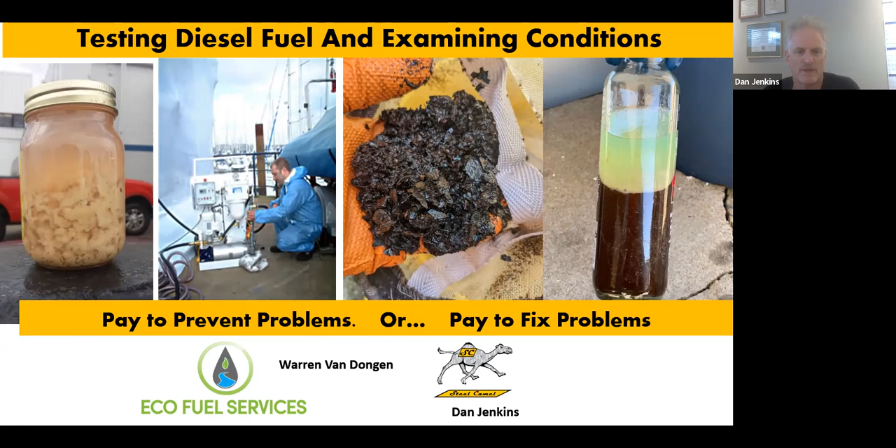So why test? Why should you pay attention to water? Well, I got 7 good reasons. One is corrosion. Two, pumps wear, injectors wear. Three, tank cleaning. A lot of people in this industry pay for tank cleaning. Warren and I are both involved in tank cleaning, but we want to help you avoid tank cleaning if we can. We want to improve fuel quality.

Warren, really quick, can you tell me what customers really care about with fuel quality? So fuel quality for my customers, because we're talking mainly long-term storage of emergency fuel, hospitals, data centers, it is about preserving the uptime of their equipment, keeping the fuel ready to go, which means keeping the water out. Once you keep the water out, you reduce a lot of particulate caused by corrosion and microbial growth and accumulation. So we're looking to keep the fuel clean in storage for long-term use.

You get to a boat customer, we're talking people who have usually been out on the lake, out sailing, out powerboating, get some rough water, rough seas mixing the water in the fuel tank, and it gets picked up and plugs their filters and leaves them stranded out in the lake, and that's a safety concern. It's dangerous when you're out unpowered. So yes, I sell to a guy who delivers sailboats to the Bahamas, and he's afraid he's going to get stranded and float into the Bermuda Triangle. So anyway, we're really into that.

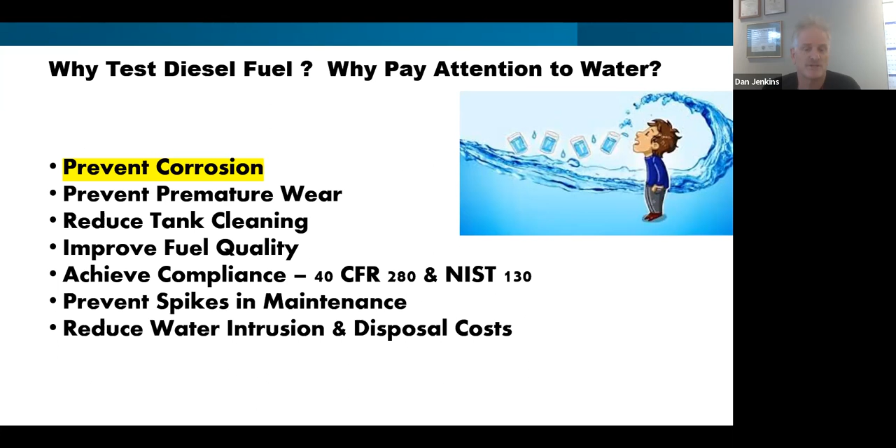And those of us in the gas station market, there are rules about how much water you could have in your fuel. It's called NIST 130. And there's also rules for leak prevention, 40 CFR 280, for those of you in the gas station industry. Okay, so we got that down.

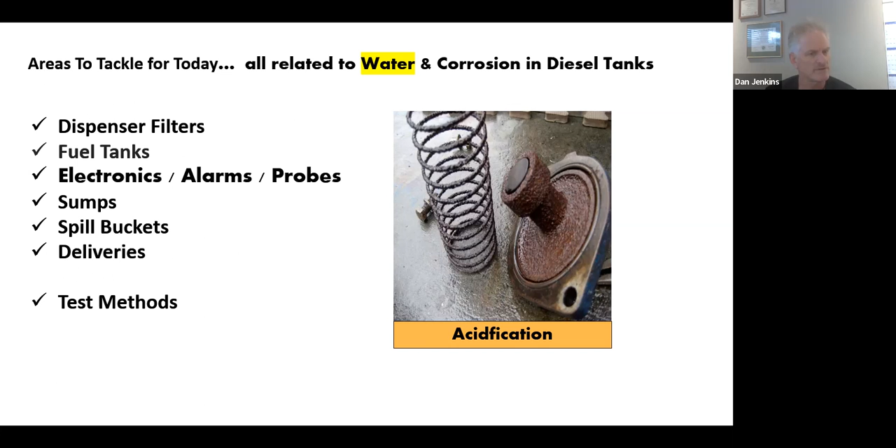So we're going to talk today about how we test fuel, but also where to look for the fuel problems with the water. So we got dispenser filters, obviously we got fuel tanks, a lot of problems in the gas station market with electronics, alarms, and probes, so we'll talk a little bit about that. And of course, one of my favorite subjects, sumps and spill buckets, because that's a very good entry point for water. We'll talk a little bit about delivery drivers, and we're just going to review some do-it-yourself test methods.

Here we go. So how did we get here, Warren? Why is there so much more water today than there was 25 years ago? Well, I have a really cool slide that I made up. Basically, it started in California, Denver, Portland, Maine, a little bit of the state of Washington, anywhere there's mountains. We had smog, bad smog in California. I grew up with smog, and we had to clean it up. So they had to change some of the diesel rules and reduce the sulfur. And that was in 2006.

The other problem we had was we were depending on oil from hostile countries, like we are today. And as you know, we have inflation and all these kinds of things. I'm trying to stay away from politics, but we wanted to reduce the amount of oil we were spending from hostile nations. In 2007, they passed the Energy Independence and Security Act. And you can see down here that 30 or 40 Republicans actually voted for it.

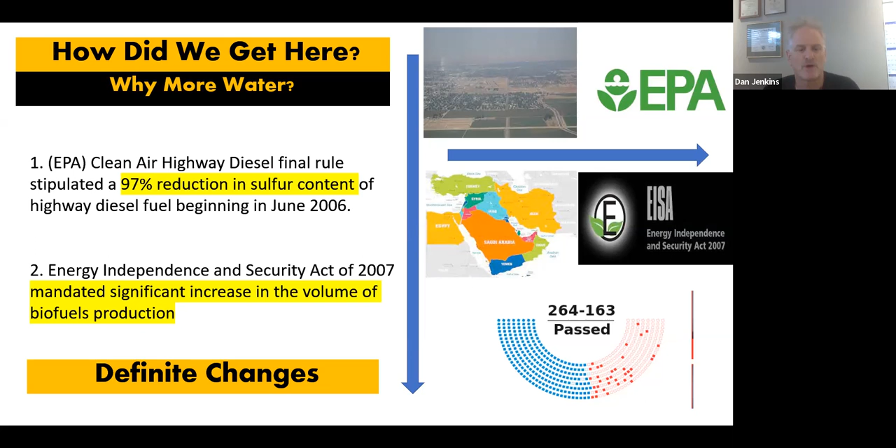So it is a bipartisan bill, and it brought about changes in diesel fuel. So we have... go ahead, Warren.

One of the big issues with going to mostly domestic production and limiting overseas production is we no longer have the residence time for the fuels and petroleum to settle the water out. Our domestic production now is like everything else, on time. So the fuel goes from the distillation process right into the pipeline, right out to the tanks for distribution. We don't have big settling reserves of fuel where the water used to settle to the bottom of the tank.

So we're just bringing water right along with us that used to be captured during the storage process. And that's why a lot of gas stations, when they get a delivery, it's all stirred up. You heard that before, Warren? Oh yeah, gotcha. And they tell you to avoid the gas station when you get a big delivery, particularly if the tank is low.

The test facilities that I used to install, we always put diffusers on the tank fills to help reduce stirring of the bottom of the tanks. But the guys want to get in and get out, right? So they're pouring really fast. Yep, 350 gallons a minute. Ouch.

Okay, so Warren, we have 5 different fuels I've listed. I'd like to go down through them one at a time and just tell me what changes you may or may not have noticed in your world.

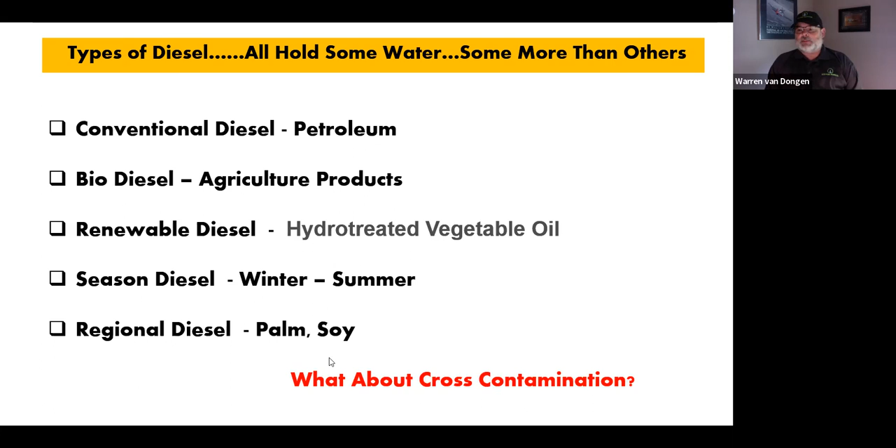Gotcha, thank you. So with all these changes in fuel, we've got more water held in the fuel column. Let me tell you briefly about some of the changes it's caused in the tanks.

One is corrosion, right here on the left. That's how I got my start, I was in the tugboat business. The guy told me he had a hole in his diesel tank from corrosion, from the acid buildup.

Two, we see a lot more fuel injectors with blown tips, and blown fuel pumps, because the water is abrasive. The water causes wear patterns, and it gets really hot and can actually blow things out. I'll have another slide on fuel injectors in a minute.

Third, down here on the bottom, we see a lot more sludge—more water, more sludge. And fourth, we definitely see a lot more corrosion on the top of the tank. Preventing this and fixing it is one of Steel Camel's businesses. That problem hasn't gone away, and it's only been a problem from about 2009 on, so only about 13 years old. Back in the old days, they never had that.

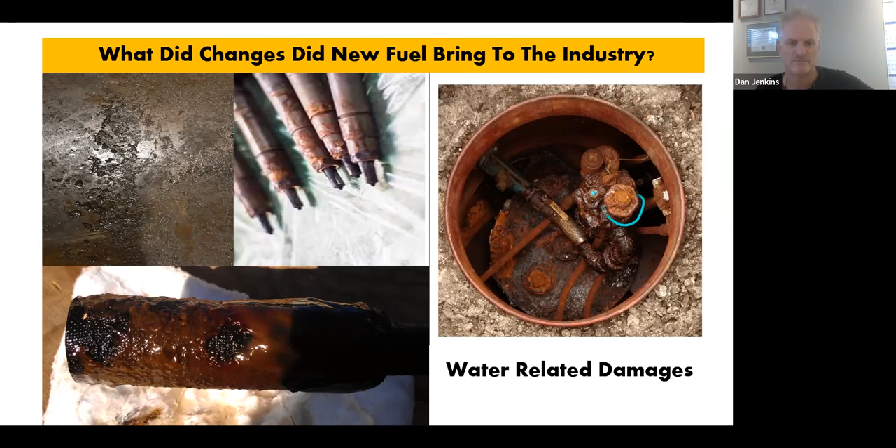Any comments on blown fuel injectors, Warren? You see them from time to time? Oh yeah, in the data center world you're always hearing about getting Cat or Cummins in changing out injectors on an engine or replacing the whole top end. That's the common rail injection system, and when you're at 60,000 psi trying to inject fuel at a 1 micron droplet size, a little bit of water goes a long way in gumming that works up for you.

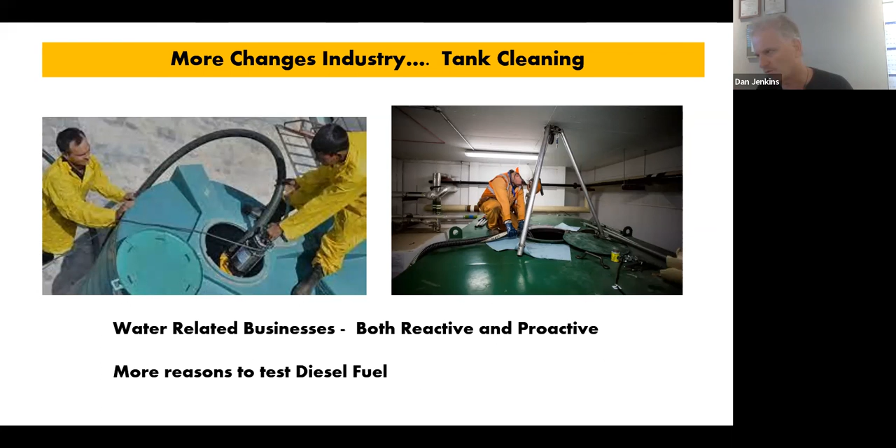Gotcha, thank you Warren. So a couple other changes, then we'll get to the testing. There's a lot more tank cleaning today, so keep on the lookout if you're having excessive tank cleaning—both proactive and reactive. A lot of people are just accepting they've got to get their tanks cleaned once a year and pull the sludge out, and then the problem comes back in 7-8 months.

There's more reasons to test your fuel if you're paying for a lot of tank cleaning. So how do we know water's getting in? If you see pump-out tanks, which is really popular in Florida because we have so much rain getting into the tank—notice this little puddle on the right-hand side. When it rains really hard, the parking lots puddle up and the lids can't handle it. In another seminar we'll talk about how to prevent that.

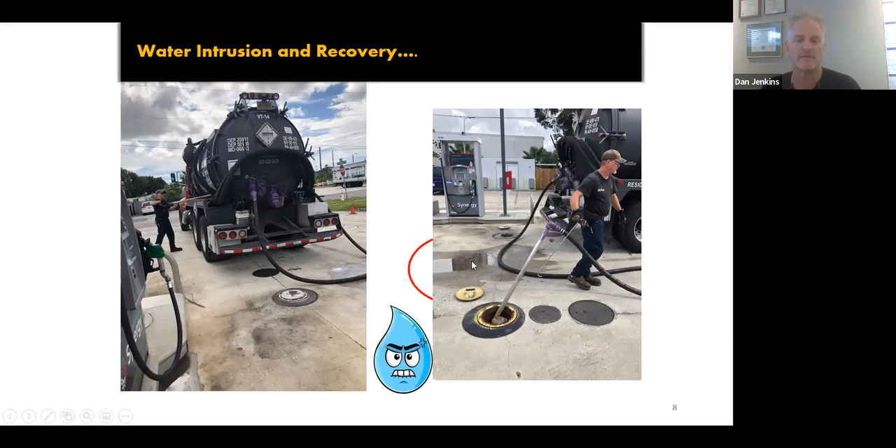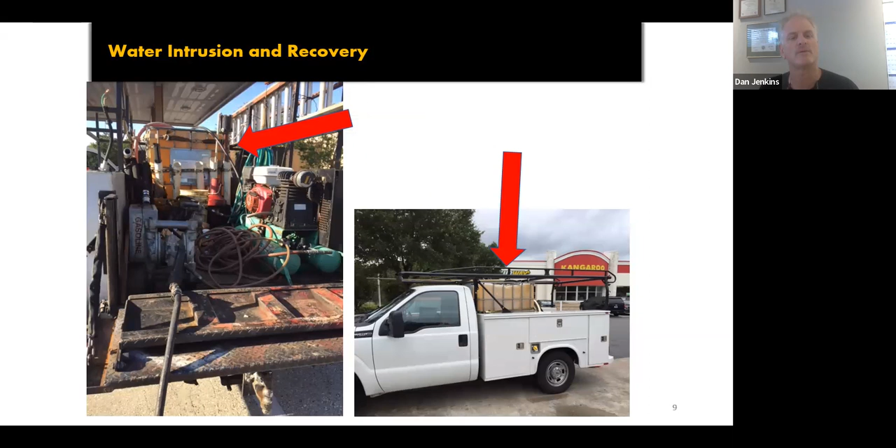Second, if you run into contractors—some of my best customers are contractors, I love them to death—but they're pumping out water all the time. If you ever see these trucks around pumping out 30, 50, 80 gallons, that's a reason why you need to test your fuel, because you don't want that to get up to 100 gallons. Another warning sign that you've got water that you need to test for.

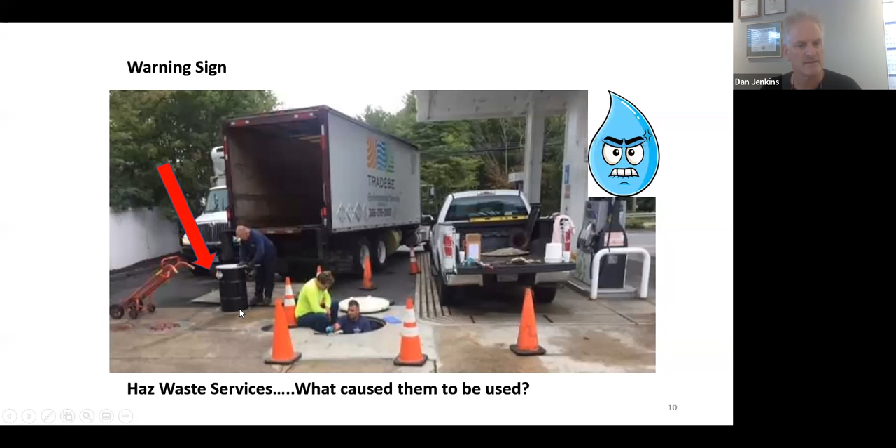If you see this guy over here, I took this picture in Boston—it's actually a hazardous waste guy picking up water, hazardous water that gets into sumps and spill buckets in the bottom of the tank. They just put it in these drums and this guy comes by and picks it up. Very expensive, particularly for retail stores.

Some quick statistics: I Googled fuel injector repair within 20 miles from downtown Los Angeles. Holy crap, 16 places listed in Google search that actually do fuel injector repair within 20 miles. That's pretty high if you ask me. What do you think, Warren?

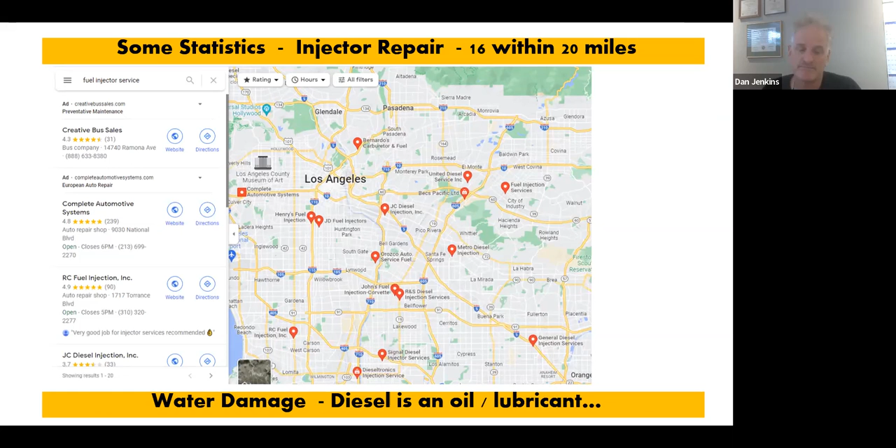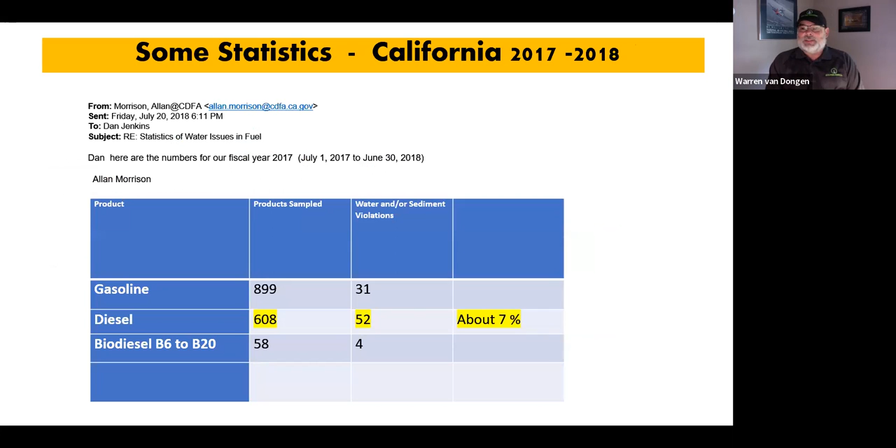Well, there's a lot of big trucks running out there, a lot of engines to be worked on and a lot of fuel issues to be remedied. But fuel is supposed to be a lubricant—as you take sulfur out and everything else, the lubricity definitely goes down. Yes, but also the water increases and causes the problem. Get back to that high pressure common rail fuel system—it's a money maker for the repair shops.

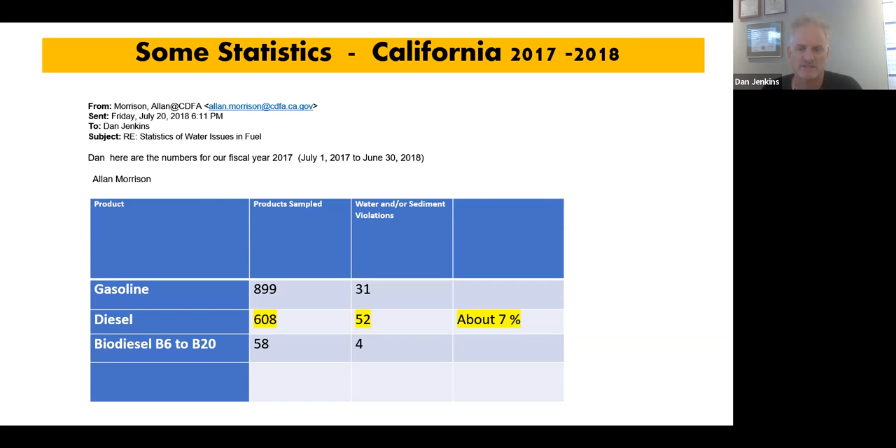There you go. A couple other quick statistics: in California, 608 random diesel tanks were tested at truck stops and gas stations, and 52 had violations for excess water—that's really high, 7%. In my old state of Florida, we had a study done in 2020, I believe, and holy smokes, 4%.

So 43 out of 1,300, we had 48 violations, right? There's about 4% of all the diesel tanks tested by the state that had excess water in there. So that's why we need to do testing ourselves.

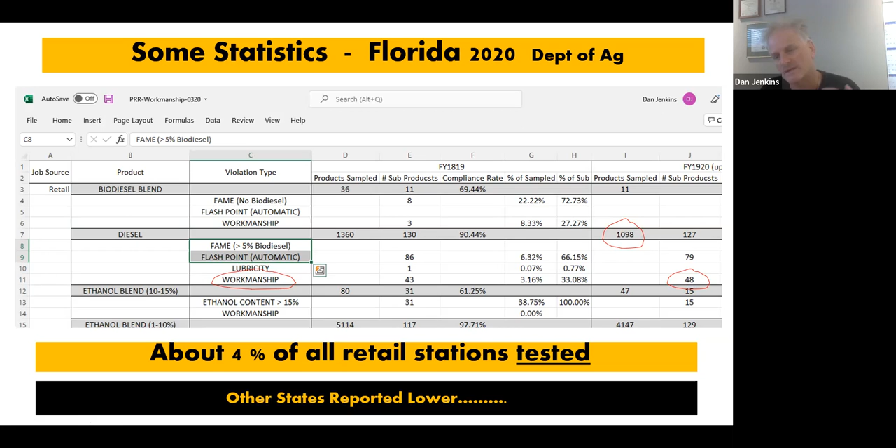Bad. So Warren talked a little about how the fuel doesn't settle out. It gets condensation buildup in the tanks, gets in the pipelines, gets in the delivery trucks. You have an empty truck full of hot air, you put cold fuel in there, just like stepping out of the shower, you get condensation buildup. So we do get water in our delivery system.

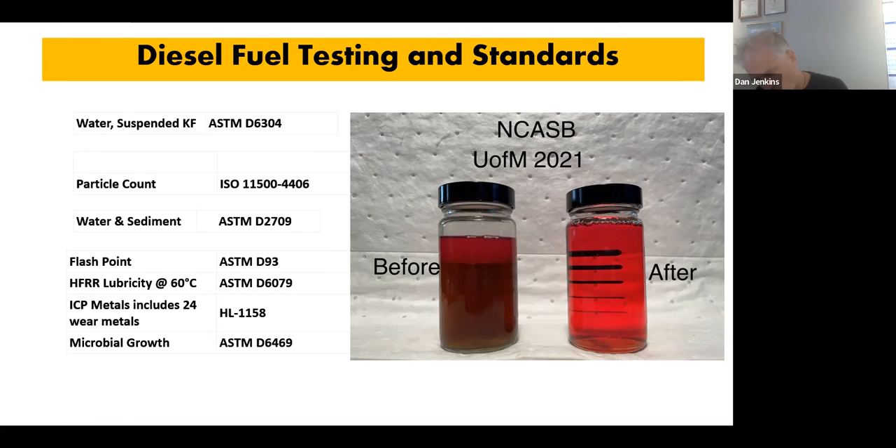When we remove this water, we actually go through very few filters. We've got these tanks where it's just a little bit of water, accumulating over time from vapor space, the top of the tanks. So in the field, we do a visual analysis per the ASTM standard. That's what the gradient lines tell you - you're judging clarity per ASTM. And then after that, the samples go to the lab for actual particulate and flash point and microbial growth testing to confirm that the fuel's good. So the bottom line of this picture is the fuel, even though Warren cleaned it, gets dirty just by sitting there, right? Yep.

Gotcha. Okay, so let's review where this water collects in the tank. I changed this slide around a little bit. So we have water that collects on top, above the fuel line. We call it atmospheric - some people call it condensation. If you open up the bottom of a sump lid or the bottom of a tank, you'll see rain droplets on top. Warren, can you talk a little bit about the water at the very top of the tank? Yeah, so the water at the top of your tanks is open to the atmosphere. So everything that's outside the tank vent is going to end up inside the tank through aspiration.

The process of the fuel expanding and contracting with temperature, along with the water table, and any number of things, can cause the tank to aspirate. Then as you're using the fuel and drawing it down, you draw air into the tank. That moisture, especially in an underground storage tank where the average temperature is going to be in the mid-50s, becomes a problem. You suck air out of a 90-degree, 100% humidity environment into a tank at 54 degrees, and all that moisture ends up in that top space.

So then eventually number 2 happens. It starts falling into the fuel column, but it's just not quite heavy enough to fall down. That's why we have cloudy fuel.

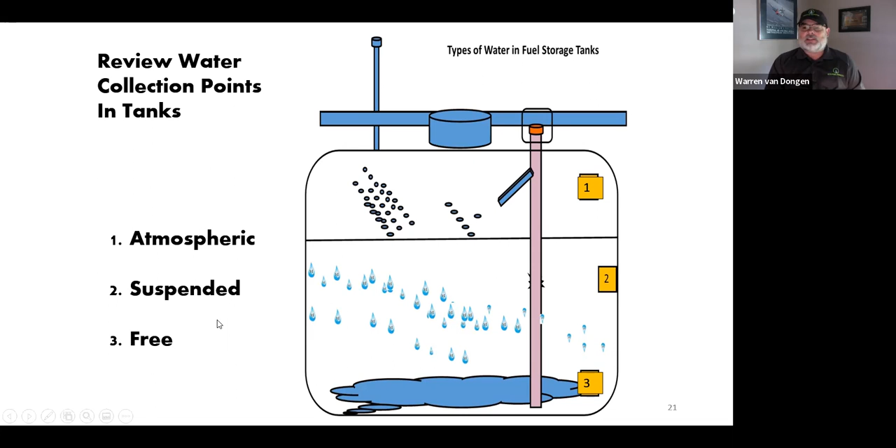So we're moving along a little bit, Warren, and I want to talk to you about 5 or 6 ways you can detect water, how you gather samples, and how you can do your own internal fuel testing and quality checks before you send them to the lab.

So I have 3 ways right here. On the left, I have a little filtering machine. You put contaminated fuel in this housing, run it through this little pump and a little filter, and then over here in the middle, you see the results - cloudy and clean. That's one way to test your fuel.

Second, we could just do visual observation. And third, some people like to do chemicals. On the right, we'll talk about it a little later - it's a little test where you can put a couple of droplets of this powder in there, and if it turns pink, it's bad.

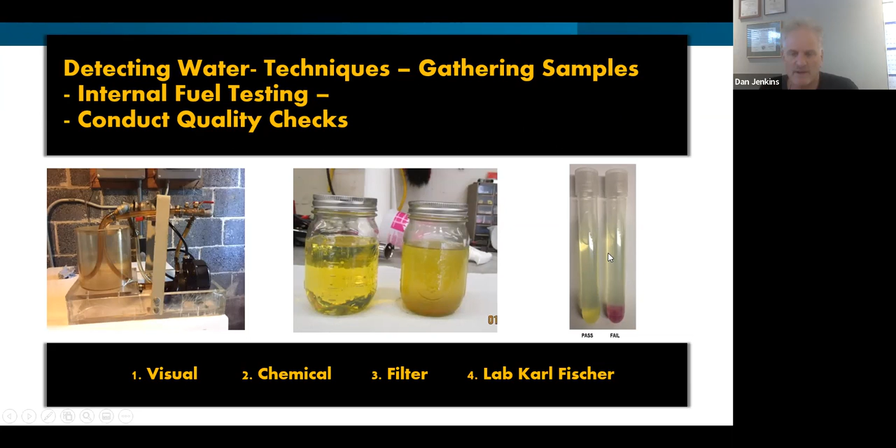Okay, so let's review some of these tests. First, we need to gather samples of the fuel. Warren, would you please talk about using this bailer? What do you like about it? What don't you like about it?

Every method of sampling has its pros and cons. The bailer is nice because it gives you a nice cross section of the fuel as it passes through. But as you see, the bailer has a tip that doesn't allow it to quite get to the bottom of the tank. So you miss free water when you use the traditional bailer style, but you get to see this really nice cross section of what the bottom of your tank looks like.

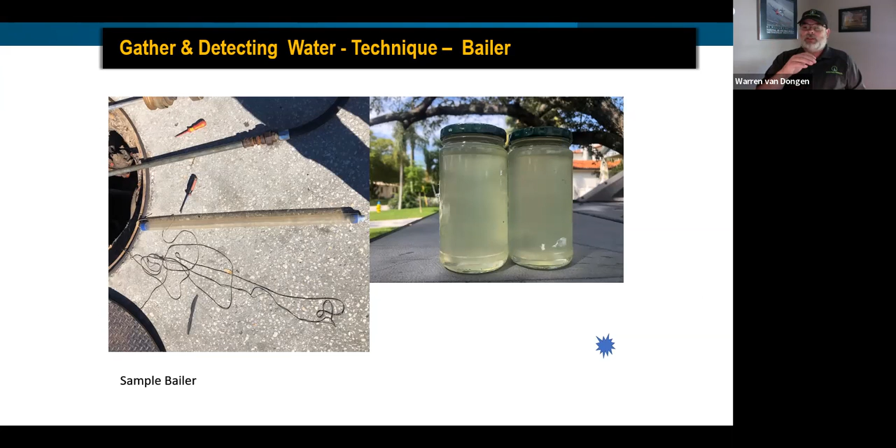Okay, we use a bacon bomb. The bacon bomb is right there. I like the bacon bomb because as it passes through the fuel column, it's not collecting anything until you hit the bottom and you pop the popper up, which creates a bit of a vacuum. So even though you're not right at the bottom of the tank necessarily, that vacuum pulls up the sediment and stuff that's actually on the bottom. That's why I personally prefer a bomb sampler.

And then the other common one would be a vacuum pump - you drop a hose down and use a vacuum pump to gather the sample.

And then you pick up your samples, and we could observe and do our own internal testing and see what we got. Hopefully it's bright and clear, but you never know - you're going to get some nasty stuff in it sometimes.

Another way to detect and gather fuel samples is to take fuel out of the nozzle and do your own visual test. There are rules, and different states have different rules. They all kind of belong to the National Institute of Standards, NIST 130, but every state has its own variation, and they have what's called a clear and bright visual test. Warren, if you could talk a little bit about your experience with clear and bright visual tests.

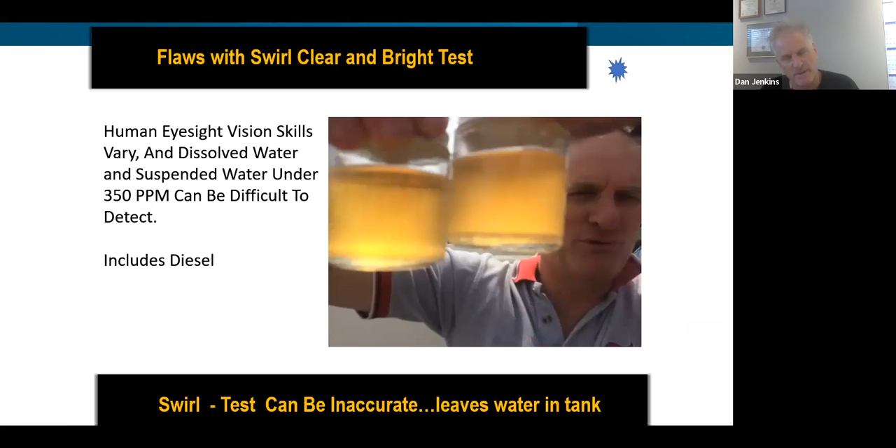It depends on what market you're in when you're looking at these things. And there's a problem with the eyes - not everybody has perfect vision. I certainly don't, so there's some discrepancies with the human eye. It can be inaccurate, and depending on where you get your sample, you could actually be leaving water in the tank and not even know it.

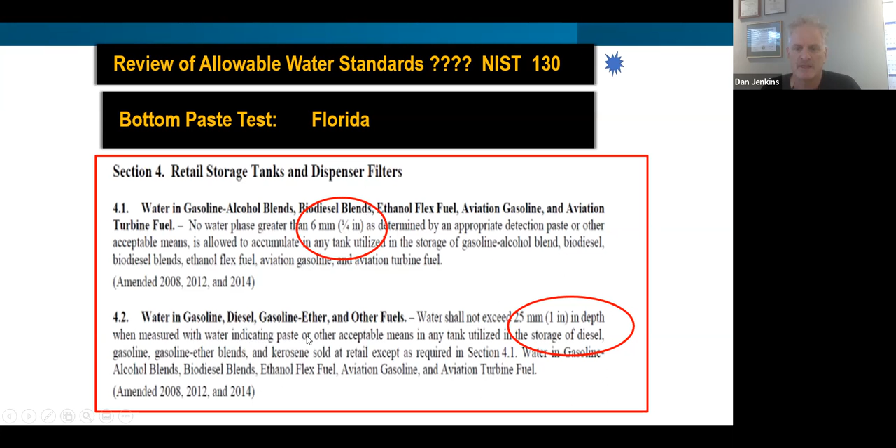On the retail side, NIST Handbook 130 says on diesel no more than 1 inch in depth - section 4.2: water shall not exceed 1 inch depth when measuring with water indicating paste or any acceptable means utilized in the storage of diesel. Let's talk about that, Warren.

What do you like about the paste and what don't you like about the paste? I don't like anything about the paste personally, but it is accurate in identifying - if you've got 1 inch of water, the paste is going to be accurate in telling you you've got somewhere close to 1 inch of water in the tank. Take away the condition of the stick and the strike plate on the bottom of the tank that you're measuring against, but it does indicate water versus fuel.

Oftentimes I see people not leave the stick in - they put the stick in and then pull it out. They don't leave it in contact long enough for it to react, so you see some false negatives.

Let's talk about this picture then. I live in Florida - as you know, 150 years ago we were Indians in swamps, that was it. And so some of the tanks settle in Florida. I was wondering, Warren, if you could talk about your experience when the tank is not perfectly level.

Settling tanks is pretty common everywhere, and there are some installation contractors and customers that prefer to have some tilt to their tank. But the problem with tilt to the tank is, if you don't know the low side and represent where your level probe is, you're not going to know how accurate your water reading is. Especially if you've got a tank that's blind ended and you don't have access down there, you could have 3/4 inch of water on one end of your tank, and it doesn't show up any water on the high side of your tank.

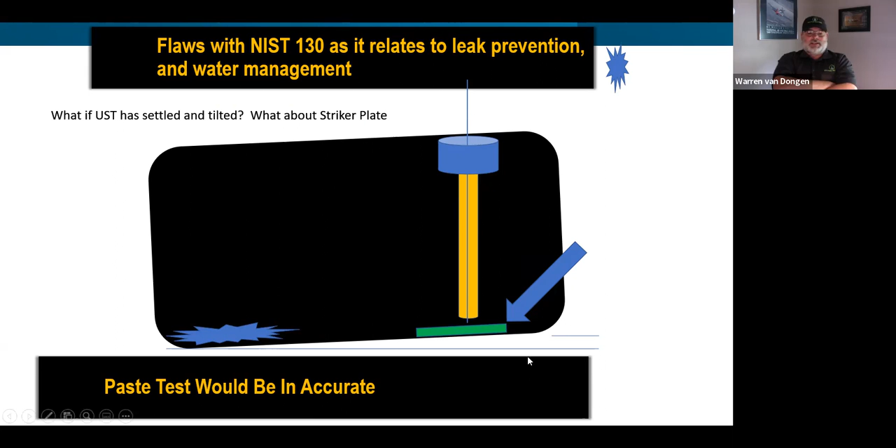Which leads me to my next subject. I deal with a lot of contractors - my background is in leak prevention. That's how I kind of got into this business, with the corrosion side. I got involved in this tugboat, and lo and behold, they had a hole in their tank, right?

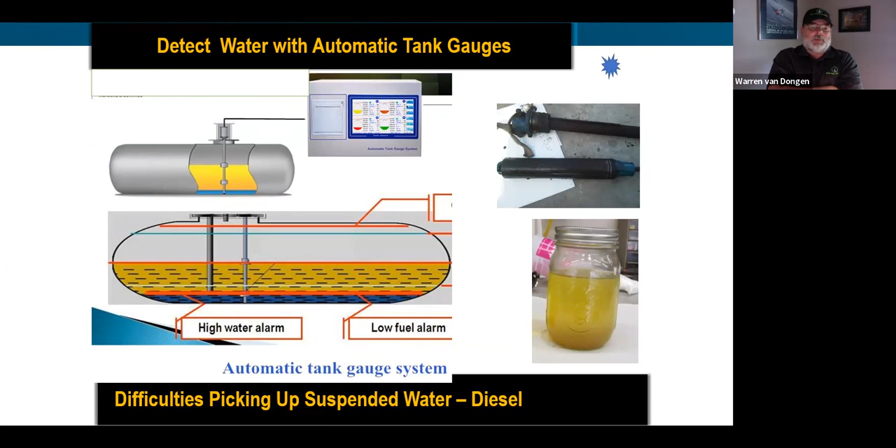So electronic tank gauges are absolutely fantastic pieces of equipment. However, like everything, they need to be maintained. You need to pull the probes out. A probe that is designed sensitively enough to float on diesel, and then have another probe that will float on water but still be heavier than diesel. It doesn't take a whole lot for that to be set off balance by debris, or in this picture, water accumulating on the float traveling down the rod, the magnetostrictive probe from a leaking cap. So there's inaccuracies in a poorly maintained system.

Plus, if you look at the shape of your water float, it's a flat bottom, but the bottom of your tank isn't flat. It can hang up on the edges of the curve of the tank. So again, you could get slightly inaccurate measurements, and you're not aware they got water building up in your tank.

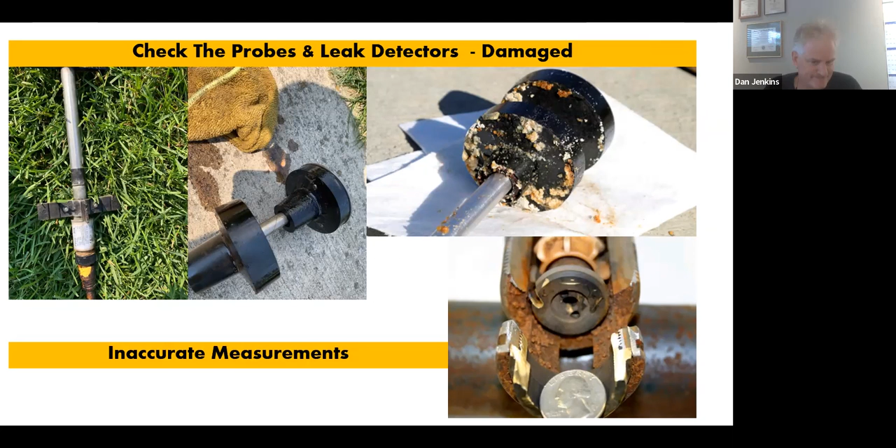Another thing I pride myself on is looking at the condition of the filter, and asking why, particularly in the gas station market, they use so many filters, and so many different types of filters. A lot has to do with customer complaints about slow diesel. Some people say screw it, just pump the fuel and get the customers off my back, I got to keep the store open. So some people use particulate filters on diesel all the time just to keep the flow and keep the filters from plugging up. Other people want it to plug up so they know they have a problem.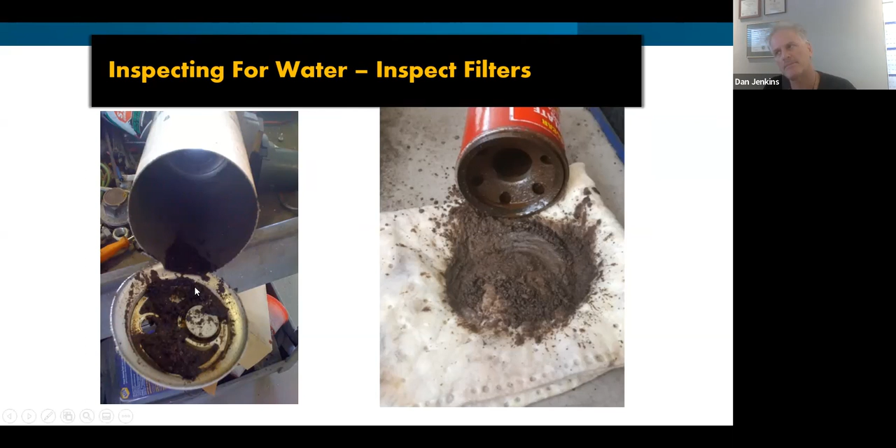Yep, and this one came from a government facility. And then on the right we have dirt. Well, how's that dirt getting in the filter? Where did it come from, how did it get in there? Well, if dirt can get in, water can get in. So one way to keep up on your fuel maintenance is to constantly check your fuel and also check your filter. And this is good old Iowa sludge.

Warren, why do we have so much sludge in Iowa again? Well, Iowa loves corn, they grow a lot of it, and they love making diesel fuel and ethanol out of it. And the biofuels just hold moisture. Yep, suspended moisture allows microbial growth, which allows the development of slime layers like this over top of the filters, the pumps - every place it can go, you'll see this lovely bit of slime growth.

And that's a nice picture too, I got some really nasty ones on other slides. That filter looked like it was only about half used. Yeah, and that's kind of weird - it's a particulate filter as well, in diesel applications, so it throws me off why they're doing that, particularly when they got sludge, because they want the fuel to pass.

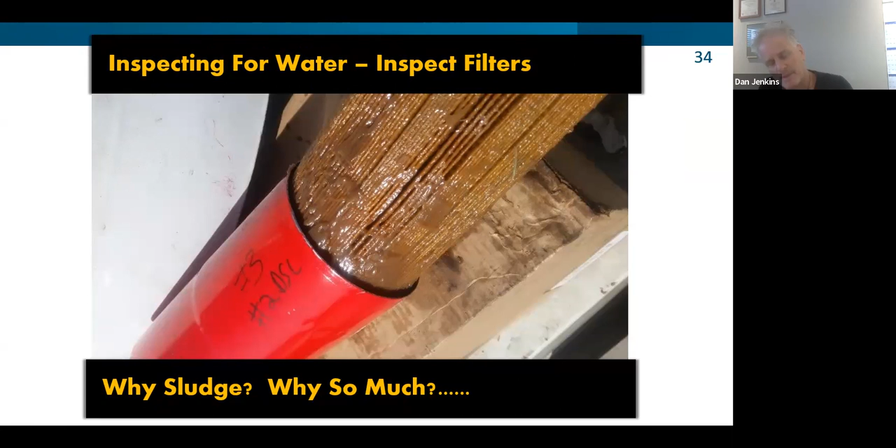If you're really into inspecting your fuel and want to do it quick to know if you have water, I'll run through some quick tests. This is sold through Steel Camel or our friend Dieselcraft, about $10 per test. In 30 seconds, you put a couple fuel samples, add a couple pebbles of chemistry into it, and in about 30 seconds it will turn pink. If you have pink, you failed your test - you have more water than allowed.

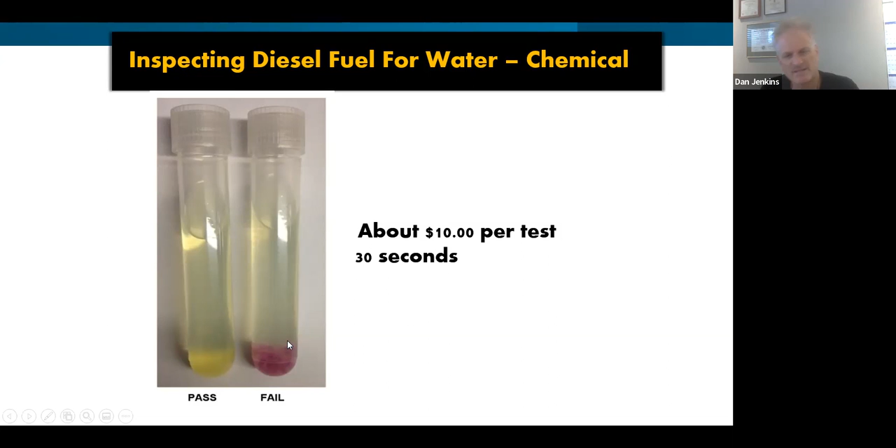Two, we do diesel fuel absorption tests. Steel Camel sells these little socks for a few bucks, and they absorb water. So if you want to see if you got water in there and you want to get it out, you can put these little socks in there.

They're called camel tails, a couple bucks each. Put them in there and shake it. Within 3 or 4 days, shaking once or twice a day, any suspended water will get sucked into that sock and won't be able to get back out. Like you'll see on the left, it'll be clear.

That's kind of popular these days. People want to have a handle on their fuel and see if water's building up. We actually now have a 6-foot sock that's 3 inches wide for the big generators, called the triple gonzo. It's a good way to test and see if water's building up in your tank.

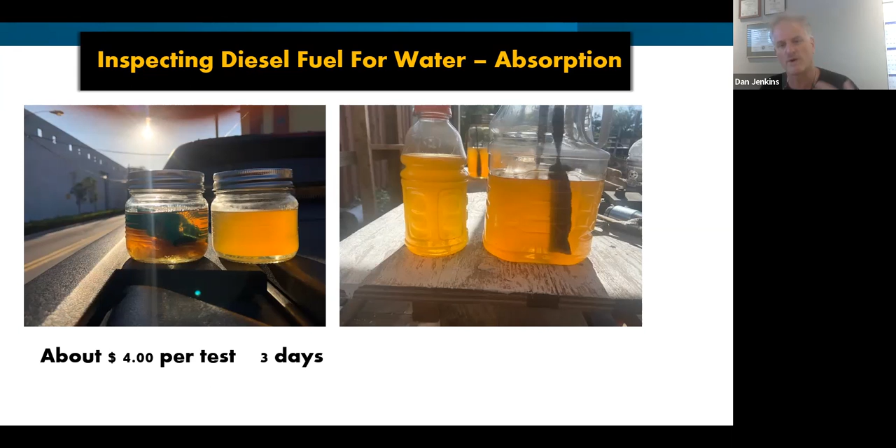Another way to test fuel for water is to run it through a little filtering machine. This is ours, Steel Camel. It's about 300 bucks. It's got a little pump, a little motor, a little holding tank, and a bunch of valves. You run your fuel through here for maybe 3 or 4 minutes, then flip a switch and it runs through the filter.

On the right, you can see how it started—it was cloudy, with a weird hue because we've had sludge in our tank lately. After about 10 to 12 minutes, you check another sample, and lo and behold, you got clean fuel. So you know you have water, and you know if you can get it out and avoid tank cleaning.

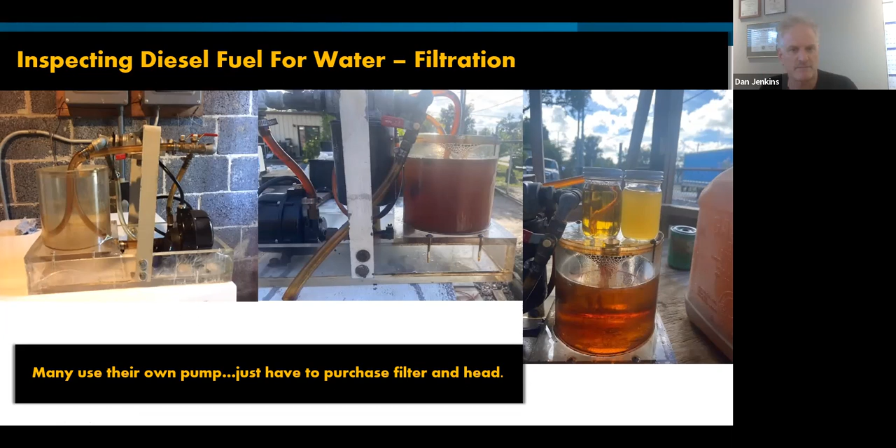If you use this little filtering machine, you don't have to pay for tank cleaning. Keep your fuel clean and dry and you'll have less problems. This takes about 10 minutes. One filter will do probably 10 to 12 tests, so it's about $3 to $4 a test. That's what it looks like on the right and left. We really like it, and a lot of people use it.

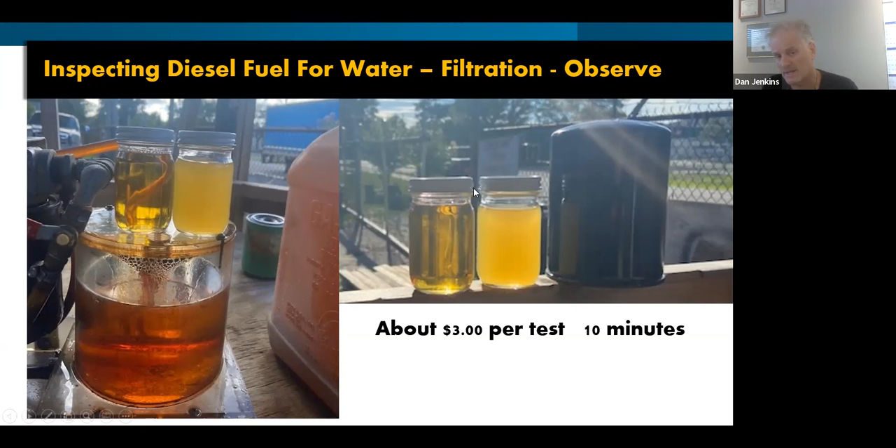Yes, you get people standing over you, anxiously waiting for the problem to be resolved. Right, if you get ahead of it and get proactive, pull your samples, you know what's happening. Even if you have to do tank cleaning, you do it as a preventative maintenance measure at a fraction of the cost of actually having to have a tank cleaning. Yes.

And that's pretty much how we push as well—get ahead of it, stay ahead of it. The long-term costs go down substantially. So it doesn't matter if it's trucking, some guy going over a mountain pass—check your fuel before you go.

I'm in Florida, so I have customers in Miami that do a lot of sailing to the Bahamas and back. Guess what? They test their fuel, and you get, for lack of a better word, crappy fuel in the Bahamas. So they test for water and buy our socks, and they constantly check if water's building up.